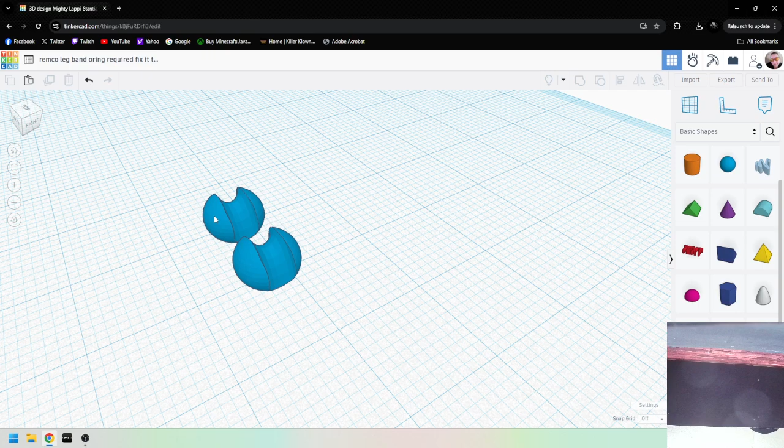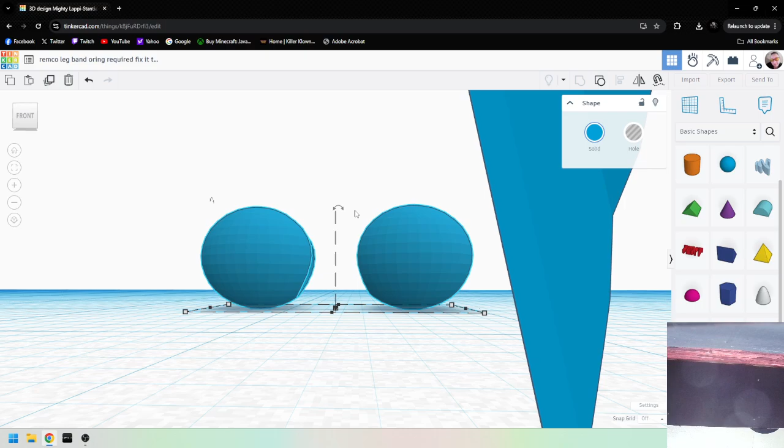Shebang. All right, I did this up, but after looking at this one, I'm gonna refocus on this one because this one is 7 point something on the circular side. 7.8 roughly. Okay, so what are you now? 5.6. That should be 5.8. Okay, which means this right here. Oh, that's because they're one piece. I gotta separate them. So I'm gonna end up just deleting you. Okay, 5.8. Is that what that was for height?

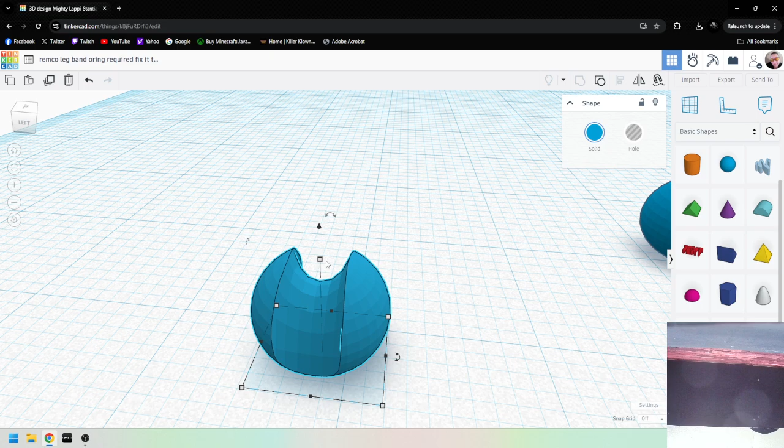7.9. So now that's the one that changes. 7.9. Ooh, chunky boy. It changed up a little bit. Okay, so 6.9. I'm gonna check it. Now you guys ain't seeing this, but 5.9. And lengthwise is 5.9. And how about the other way? That one's 5.8, but that's 5.9. That's fine. 7.5 is that. So, what did I make this? 6.7, 5.9.

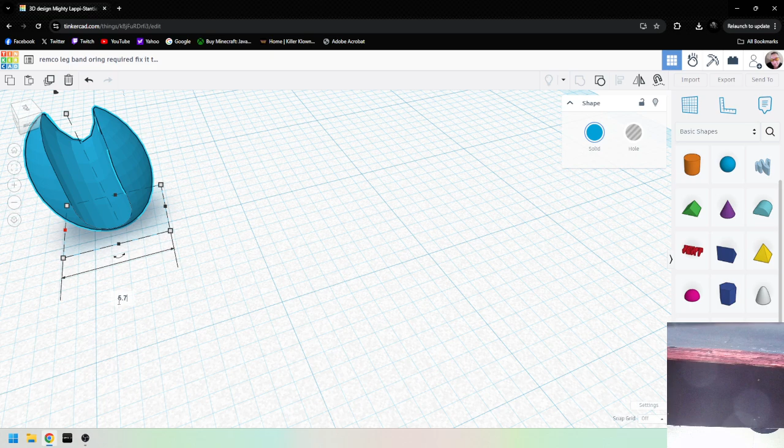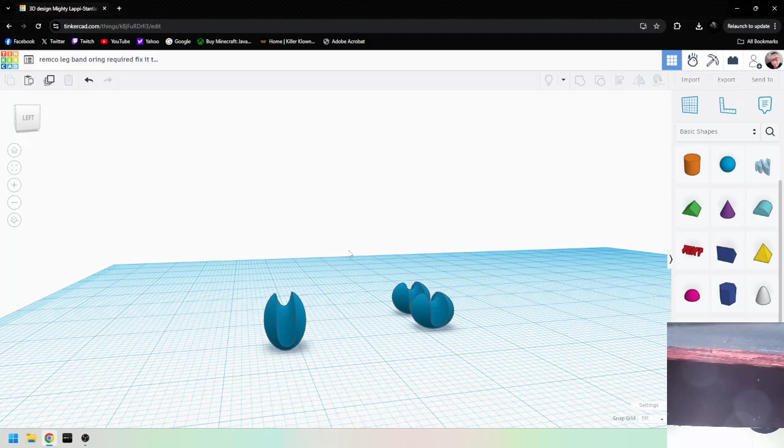This one here has to be second. This one here has to be 6.7, right? That's the skinny side. So, 5.7. That was right the first time. 5.7, and then this one is the one that's got to be the 6 something, I think. 6.7. Okay, that's better. It's going to be very small, so it's not going to matter. We just have to make sure that we can get that O-ring over it and inside, eating up some space. So it's going to be okay. I really want to make that 6. I don't know why, because once it snaps, it's no good. If you make it any bigger, it's just going to take up space. All right, so now I'm going to take this, copy, paste.

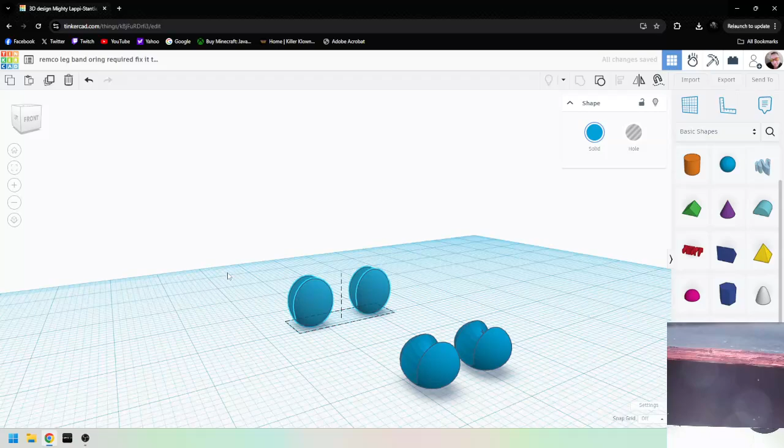All right, now we're going to meld those together. We're going to change the color to a bright red, just because, and then we're going to click on it, export it, STL, please, and it'll be whatever it is. All right.

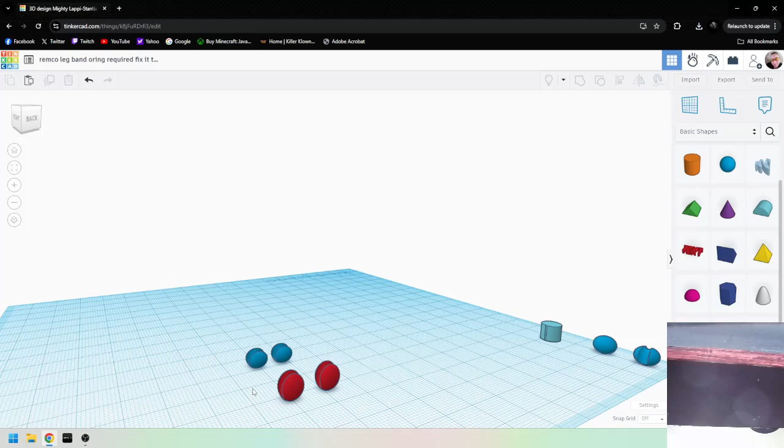So this is my solution to a busted up Remco figure, Conan figure, because they're so expensive. I think if you get a complete one, they're at least $200-300. But busted up, I don't know what they go for, and I can't find one because no one's got them. No one really collects them where I am. The only one I want is Jewel Thief, because he's like a knockoff of Skullman, which is a knockoff of Scareglow, and that's what I want.

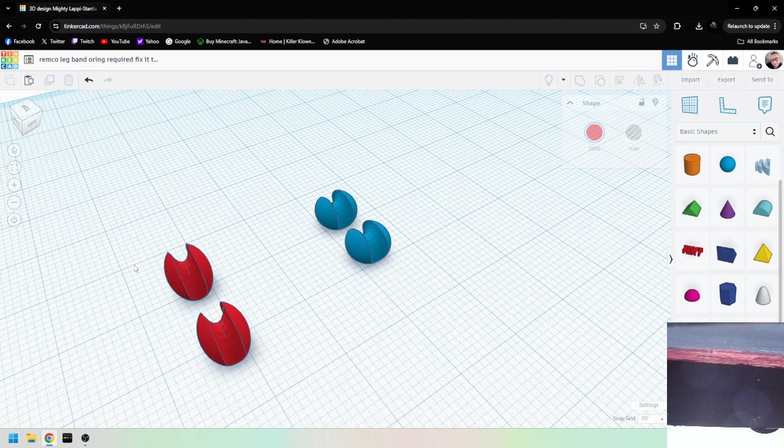All right, so I did that. Now we're gonna go into our Creality slicer. I like this one, not the 4.8.2, because it's easier for me to use, that's the one I use. All right. Now we got that. Download. Is that the right one? Ooh, you're not supposed to be there.

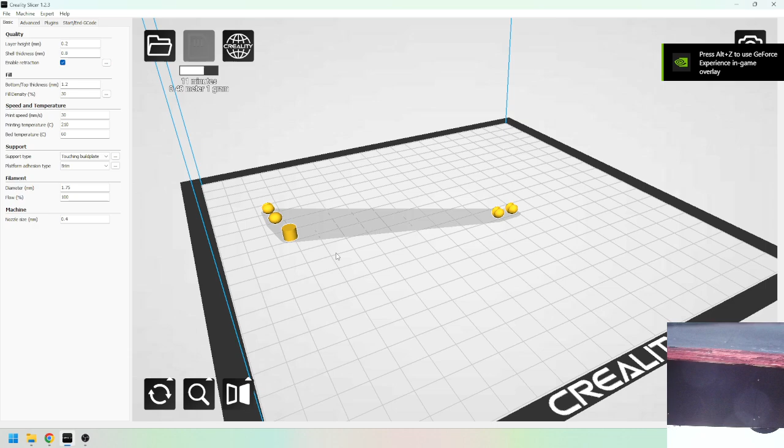Split the parts. Oh, I don't know which one belongs to what. Okay, I'm gonna reload. Clear platform. You know what? I'm just gonna take all these right here, and I'm just gonna delete it, just so I know what I'm looking for later. Okay, so I'm clicking on you. Export. Yes, export that. And then I have this one, and once I figure out which figure it goes to, I'll just upload this.

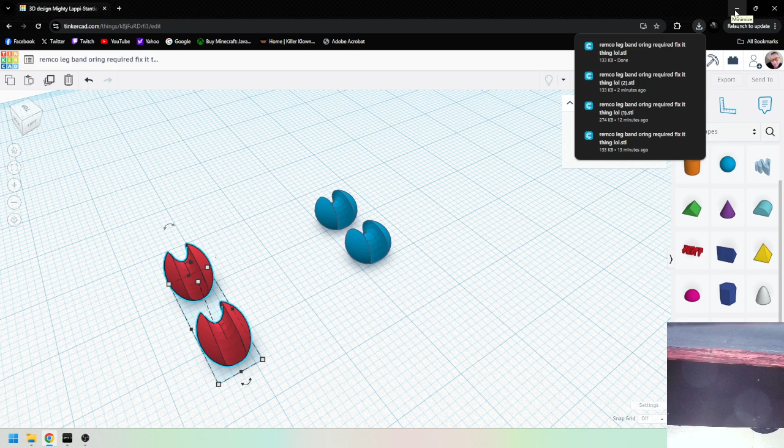These are definitely going to require you to sit there and then go out and buy really small O-rings at the plumber shop. Oh, wrong one. Why am I doing that for? Okay, there we go. Bang. All right, there we go.

And I would recommend 0.1 in your slicer. Your fill density doesn't matter much. I would make it 20, because anything after 20, if it's small like this, is going to be like as if you did 100%. I always want mine at 210, but you can do it at 205. It's not a big deal. Bed temperature 60, touching buildplate support type. You don't really need any supports for this, but yeah, give it a support. Give it touching buildplate, and it should only take you 6 minutes.

All right, and I have one in there. Bang. Now I don't have a figure, but I know you could probably get an O-ring that'll definitely fit this. It's gonna be a small O-ring. So you're gonna put it through, and then you're gonna pull it.

You're gonna cut this out. No, don't break the stem that it's on, but you can just sit there and cut into it if you got a piece that's already missing one side. Try coming from the bottom and then snap it off, and just kind of try and get your flush cutters on there and clip that. You guys ain't even seeing what I'm doing. 1 second.

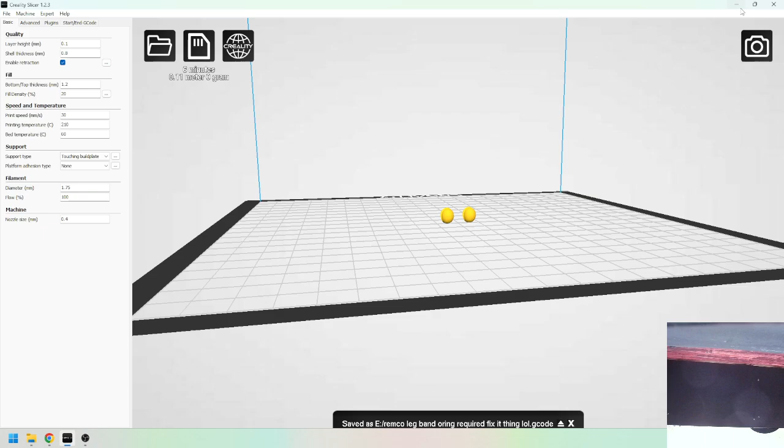There we go. So, just pretend like this dark side's the broken side. Okay, this is actually a broken side. See, it's been glued. I just glued it back together so I can make a mold of it if I wanted to. Okay, so this piece is missing. You're gonna come in with your flush cutters on an angle, cut this, until it snaps off, and then since you're already gonna take the other leg off anyways, just pop it off.

Just takes a little bit of hot water for 10 seconds. Not hot water, I'd say put it in the tea kettle and get it hot. Okay, then once you get the other one off, pop it off because you're not gonna need it. And then you're gonna want to get in there and try and get this to snap like just this. Don't wreck the peg that's inside the crotch. All right, and then you can literally just do this like you would a He-Man figure with that fix I just made.

So with that, guys, that is my solution. I am gonna post this. I'll send this to the person that asked for it because I really did just make this for them.